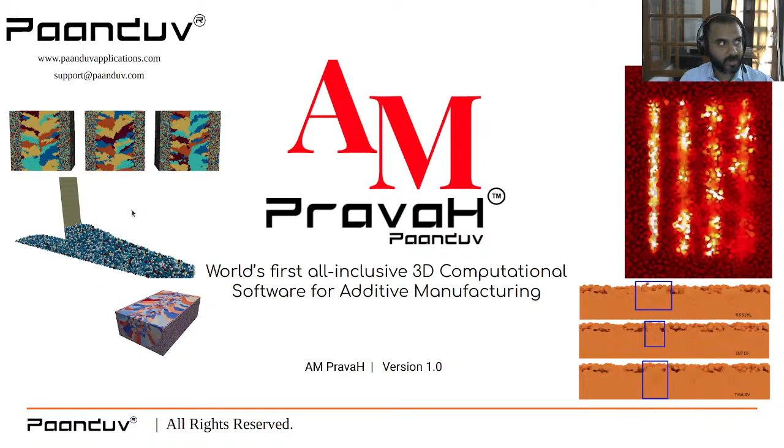Welcome everyone to this webinar on AM PravaH, world's first all-inclusive 3D computational software for additive manufacturing. Last time we left off with a webinar on laser 3D printing multi-scale modeling. This was almost 8 months ago, and we were able to

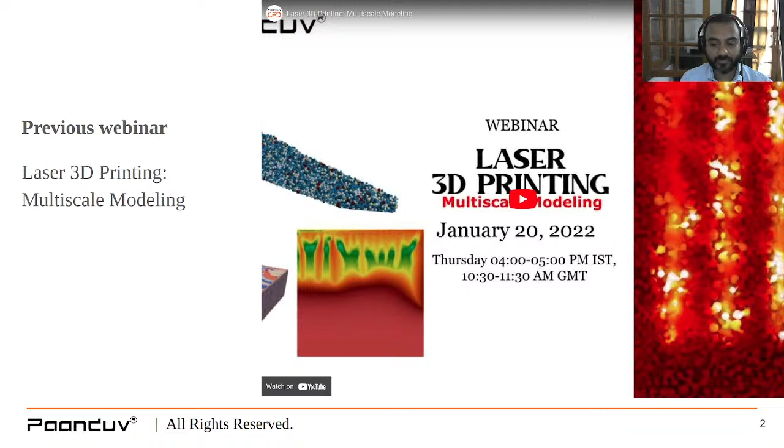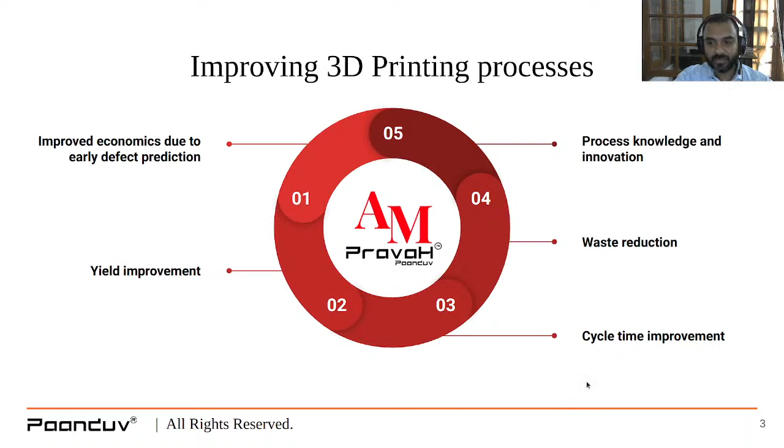indicate and show different results catering to the 3D printing industry at different scales such as micro scale, meso scale, and macro scale, and also some particle modeling as well. Now going on to the 3D printing processes, what exactly we want to accomplish with AM PravaH is improved economics due to early defect prediction, yield improvement, cycle time improvement, waste reduction, process knowledge and innovation.

The way AM PravaH tries to address the majority of these issues is dividing the whole modeling regime in two parts. One is pure physics based modeling and another one is pure database modeling. When we talk about physics based modeling, we are talking at a part scale where we want to do FEA and thermomechanical analysis of the entire part.

At the macro scale modeling, we want to perform the continuum scale modeling that involves melt pool dynamics, laser dynamics, particle dynamics, things like that. And then at the micro scale level, we want to capture the grain size, orientation, misorientation, and more of a Monte Carlo simulation side of things.

Now all this is fine for people who are into computational and experimental modeling, but additive manufacturing being a relatively hot field of research, a lot of new data is generated basically every day by researchers around the globe, and we have included an artificial intelligence module to AM PravaH, a quite advanced deep learning based module that allows users to make use of the existing data and also the new data generated either through computational modeling or through experimental modeling.

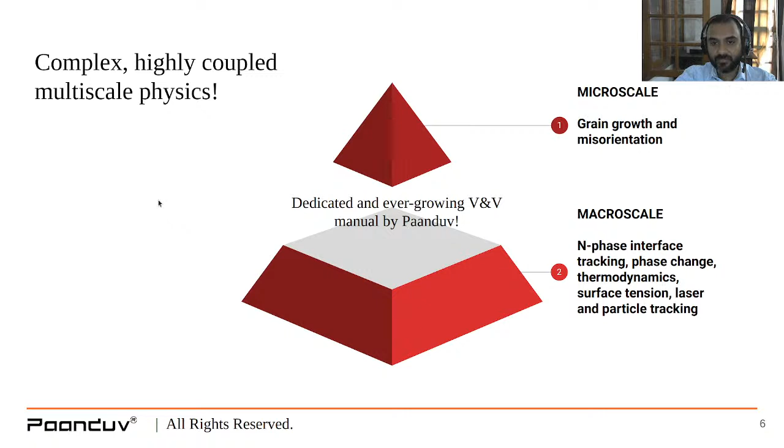On the micro scale front, you are very much interested in grain growth and grain misorientation of an alloy once the laser has run over it and it is going through the solidification phase. This micro scale modeling can have direct impact on properties such as creep and strength of an alloy. We strongly believe in a dedicated verification and validation manual for all the work that we do, and we have done the same for AM PravaH as well.

I'm going to go through some of the validation cases over the next few slides just to build more trust and convince you that we have not put together any random solvers in this software. They are quite state of the art, and as I speak, more development work is going behind them. So this is a simple case study of laser beam welding, one of the simplest validations I am going to show today, AISI SS304, and we had some results in comparison to another commercial software as well.

That software does not come close to the experimental data, so there was no point putting the results here anyways. We are comparing our data directly with the experimental data for different combinations of laser power and welding speed; there are 4 such combinations. We have experimental data available for the depth of penetration and the weld width, and we simulated the same set of parameters in AM PravaH and compared the results. You can see that for the depth of penetration, the error is under 4% in the worst case.

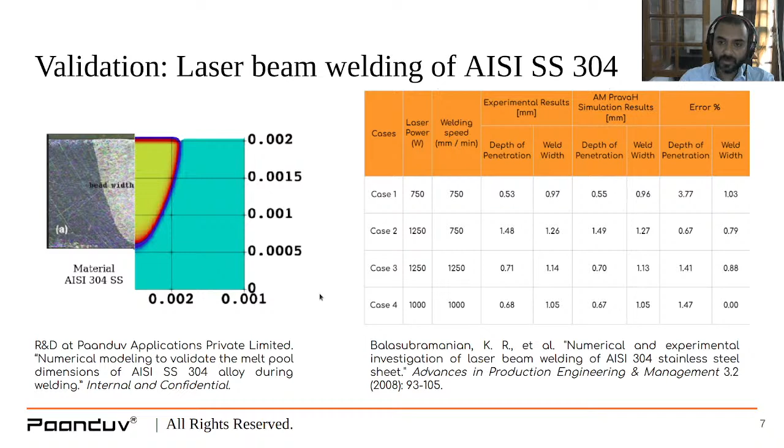The error varies from 0.5% to around 4%. And if you go to the weld width error percentage, the error percentage is actually under 1%. And based on the sheer amount of physics and numerical techniques deployed, I mean, this is quite good, excellent results, I would say.

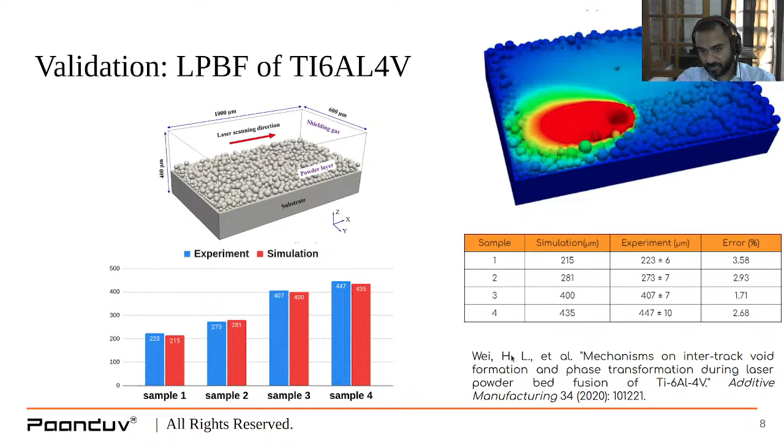Moving on to a complicated case of LPBF, laser powder bed fusion for Ti64, a common alloy. And here also the situation is similar. We have 4 different combinations of laser powers and scan speeds, and they are trying to report the width of the weld pool compared to experiment. Even here the error percentage is reported under 4%, or 3.5% at the maximum, and 1.7% the lowest. So yet again, this is an excellent validation.

Moving on to the microstructural side of things, the validation case study involves grain structure prediction of electron beam welding for nickel 200 plates, and we have 2 images on the right hand side of this slide. The top image is a cross section that is cut through the weld pool, and the bottom image is the laser scan track that we see from top, right?

And you can see that the experimental results match very well to the grain size distribution that is predicted by AM PravaH's Monte Carlo simulator. And then on the bottom side, if you look at the laser scan track, the results compare very well again to AM PravaH's Monte Carlo simulator.

And if we talk about experiment and simulation results, visually it's all good, but if you were to quantitatively compare the experimental data with simulation data, you can see the ECD, which is equivalent circular diameter. What they have done, they converted the circumference of a single grain into a circle, so that they have some relatively same parameter to compare against.

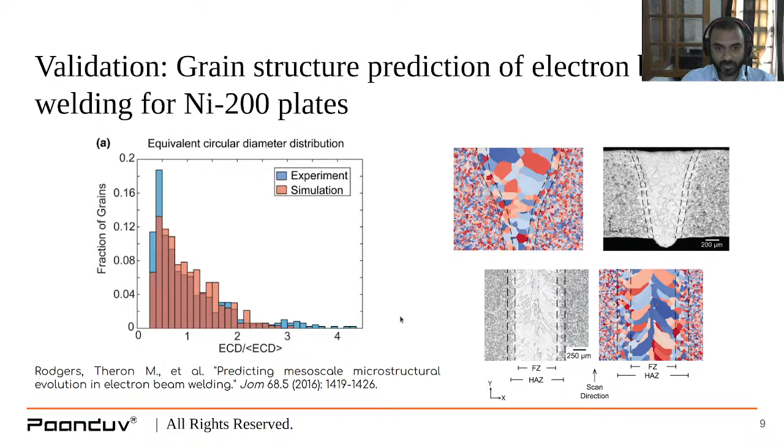And the fraction of grains, so for example, ECD of 1, you can see experiment and simulation have a very similar fraction of grains for an ECD of 1. There are some variations, but nevertheless I would say that these are quite promising values given the challenging nature of such simulations, right?

So moving on from the validations, let's focus a little bit on laser powder bed fusion, which is at the core of AM PravaH software. The process involves laying down a powder bed with a certain size of particles, and the particle sizes don't have to be constant either. They can be a Gaussian distribution or some sort of distribution such that you get the maximum packing with the particles. Then you hit a laser on top of these particles, which are on top of a substrate, and those particles melt and merge together with the underlying layer or substrate.

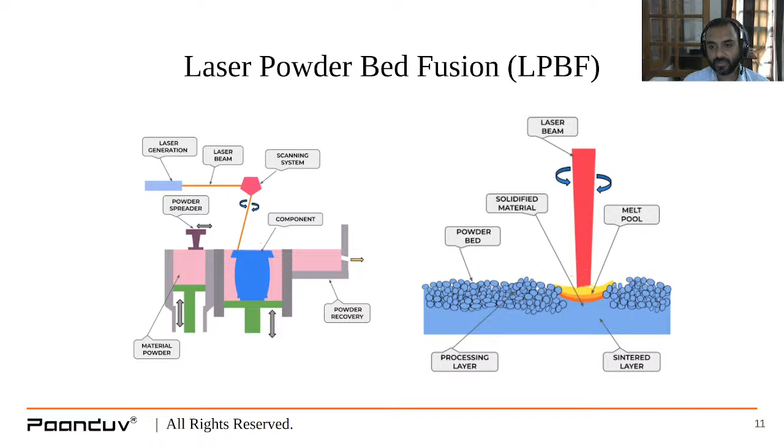So for the powder spreading part, we are using an exact DEM simulator, and for the right hand side, we are using the exact CFD simulator. A quick note on the physics of such processes. Again, you have a melt pool, you have a laser beam hitting the melt pool, you can have laser reflections and thermal fluidic convection, surface deformations, you have Marangoni effects, particle dynamics, solid state transformation, and solid mechanics as well. And overall, this is quite a complicated process, and we have tried to capture as much as possible without taking a huge toll on the computational power.

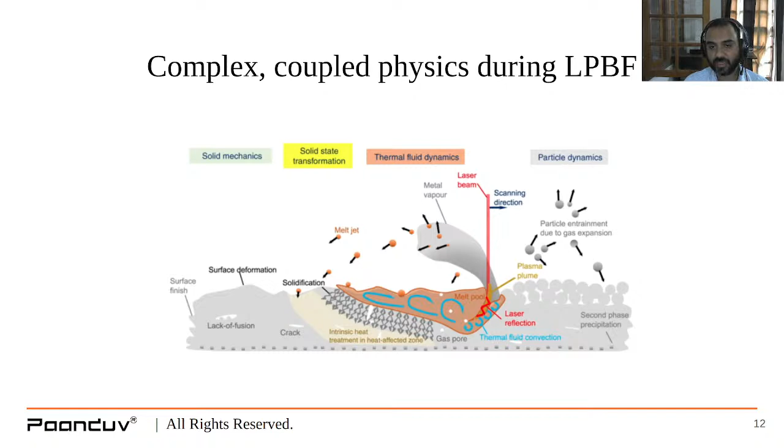A quick comparison of how the results that come out of AM PravaH look like. So we have taken 3 different alloys for the same set of process parameters. These are all commonly available alloys, but you don't have to stick to them. You can work with any alloy of your choice. And we have also provided a database of alloys, which I will be showing very soon in a live demo, where I'll open the software and run you through the different buttons and the design of the software. But anyways, SS316L, Inconel 718, and Ti64.

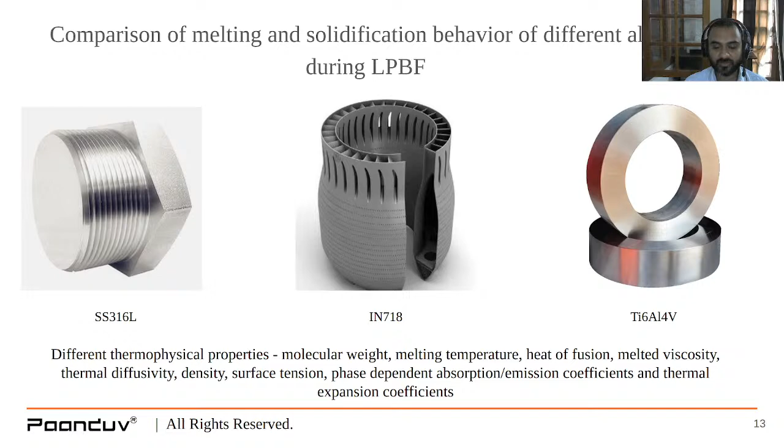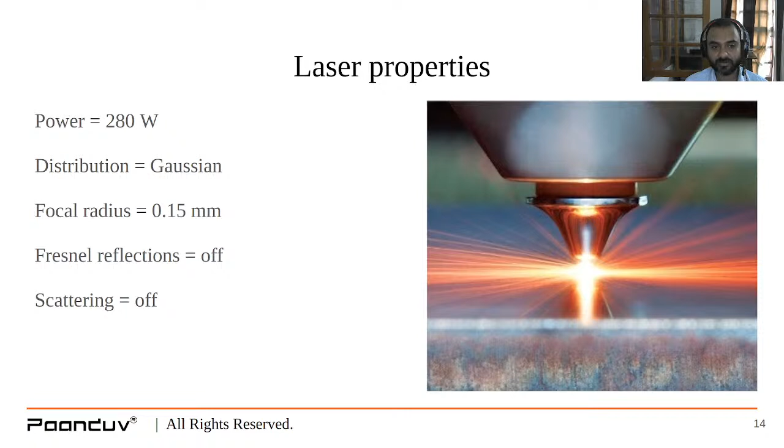Very well known alloys, and they have very different thermophysical properties, varying all the way from different molecular weights to melting temperatures to viscosities, density, surface tension. And then of course it is expected that the solidified build that you will get out of these 3 alloys is going to be quite different, even with the same set of laser properties. Right, so the power that we are using is 280 watts with a distribution type Gaussian, focal radius of 0.15 millimeter, and Fresnel reflections and scattering is turned off to keep things simple for now.

And the powder bed, this is what I was talking about. It is a Gaussian distribution, so you don't have constant particle size powder particles. You have basically a distribution going from 60 microns to 80 microns, and then the maximum of the particles are somewhere in between, as usual with this bell curve sort of distribution, at 70 microns. We are going to do approximately 2 layers of particles per powder spreading. Okay, if I show the video, this has come out of AM PravaH. I'll play it one more time.

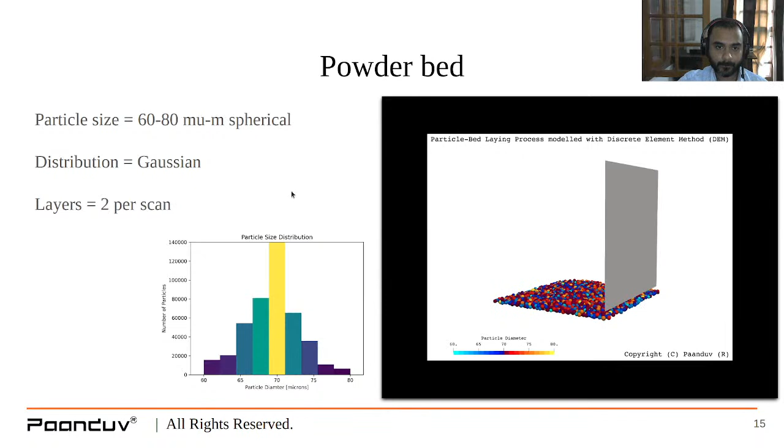The scanning strategy: there are many scanning strategies such as stripes, islands, rotation, nested strategy, but we are going to go with the most commonly used stripes strategy. We will have 1 layer, but the number of tracks are going to be 4 with a hatch spacing of 0.4 millimeter and a scan speed of 1 meter per second. We will be considering 3 phases here, and as I mentioned earlier, we can do any number of phases relevant to your problem, but in this case we will be doing the solid phase, which represents your actual solid alloy, the liquid phase, which represents your molten alloy, and the inert gas, which is the chamber in which all this activity is going on.

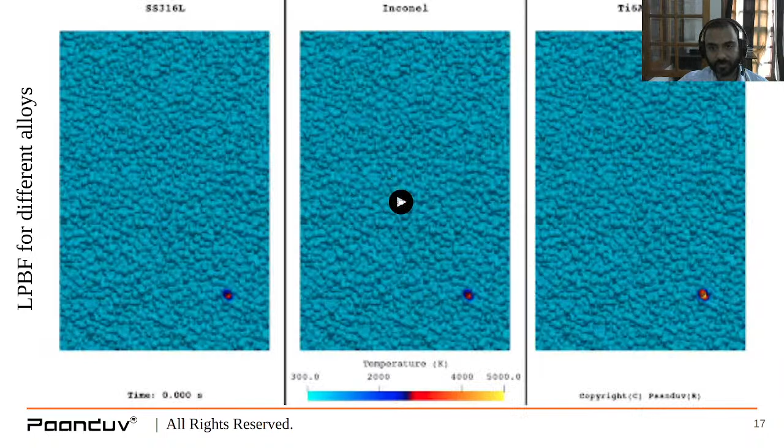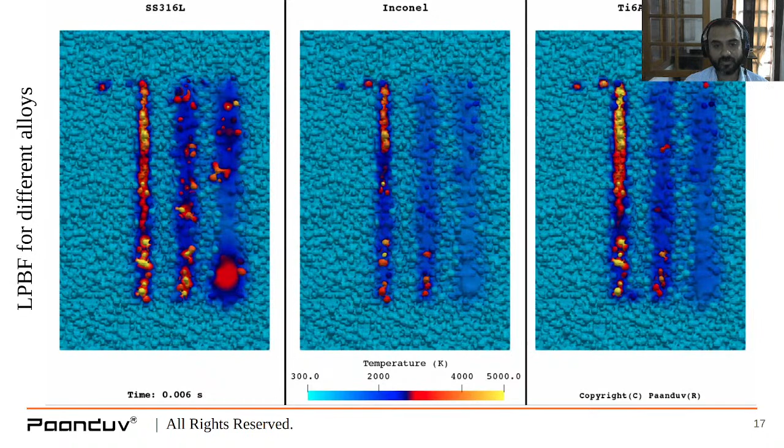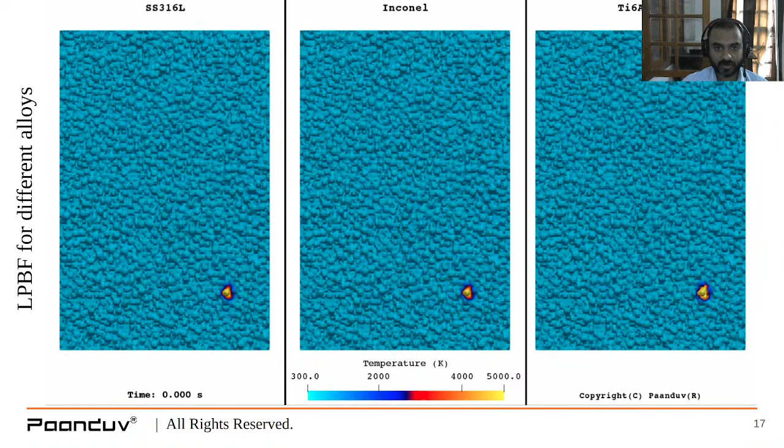So if you were to compare the results that came out of the simulation for these 3 alloys, you will see that the temperature distributions are quite different for these 3 alloys. If I play one more time, yeah, the width of the streaks and how much temperature we see is quite different for all these three. But at the end, after a good amount of solidification, you can see that the streaks or the final build comes out to be quite different.

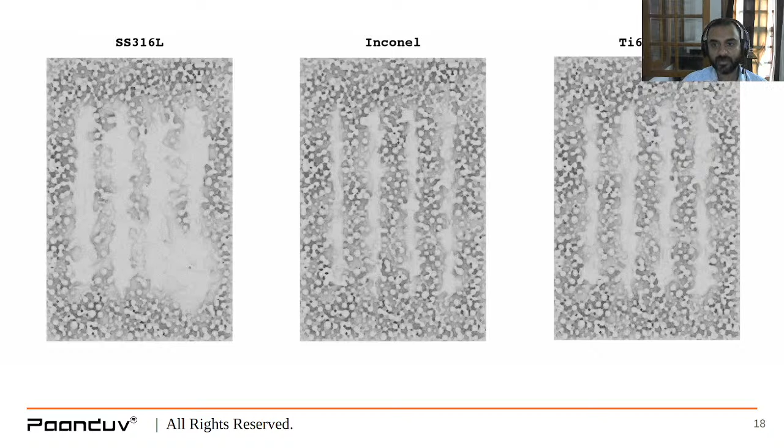Now these images are not experimental or X-ray images or anything like that. These are actually just the post-processing images that AM PravaH is capable of producing. We have coupled the state of the art post-processor available, which gives you the capability to produce almost movie grade and photorealistic looking images and videos. We have used that in this case study as well. And you can see that SS316L, Inconel and Ti64 have very different scan tracks after solidification.

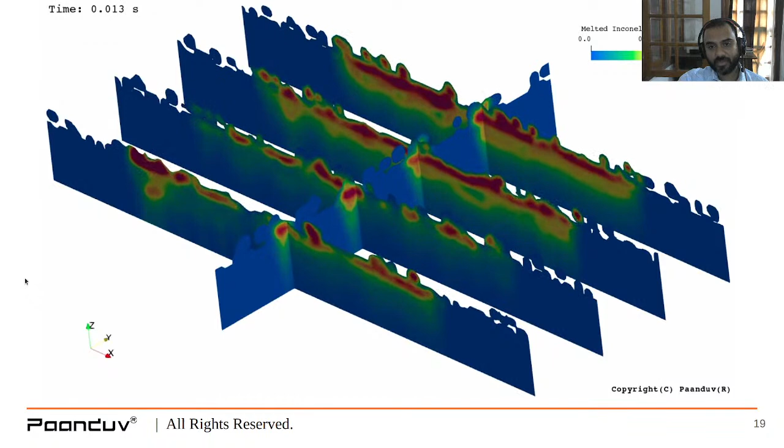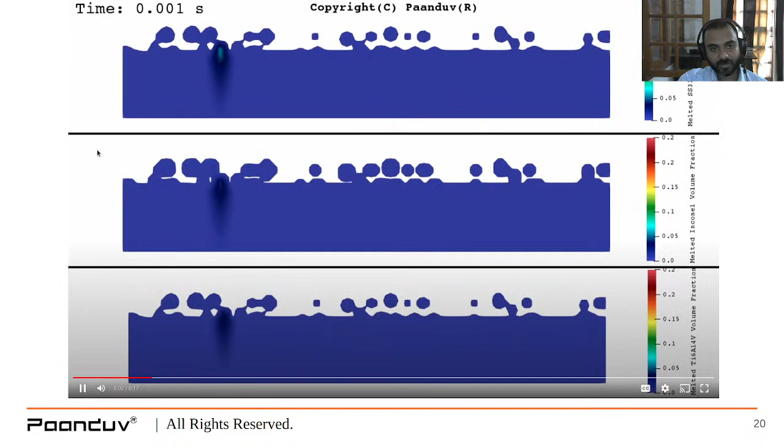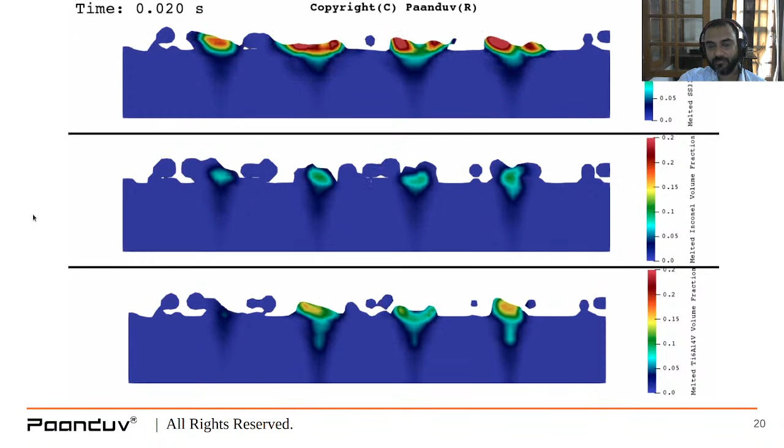Right? Some other capabilities of the post processor: you can take clips across the laser, and you can take cross sections cutting through the melt pools. You can see that the cooling is happening from the bottom towards the top, which is expected. And then if we look at the cross section of the melt pools, again these results are already quite good for the amount of computational power that is deployed. They're not run on any fancy computers, they don't take days to run, they are all parallelized. So on top of that, they give you results quite quickly.

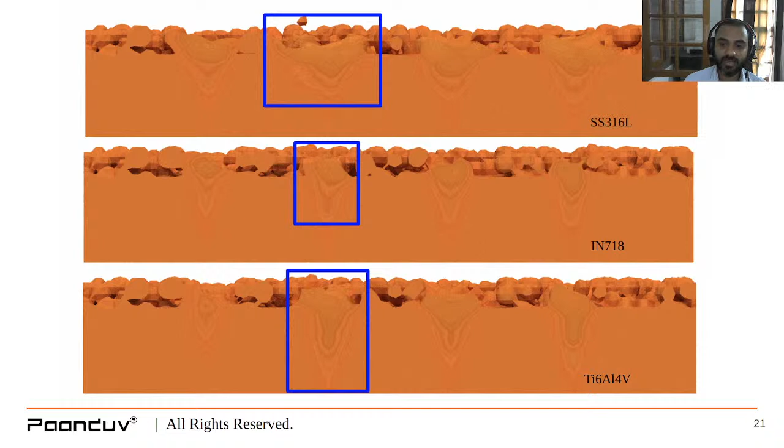And then again, this is another ray tracing or photorealistic visualization that we have done using AM PravaH. You can see for SS316L, Inconel 718 and Ti64, the melt pools are quite different, which is expected. And if we were to summarize, there are some observations not very relevant for this webinar, but yet there are some observations

regarding the shallowness of the melt pool or the narrowness of the melt pool, how much each of these alloys actually heats up when the laser hits them, how much overlapping is happening between the scan tracks, how far the scan tracks are spreading from their original position, how dynamic the melt pools are. So these are some of the observations that you could make right off the bat using this software, right?

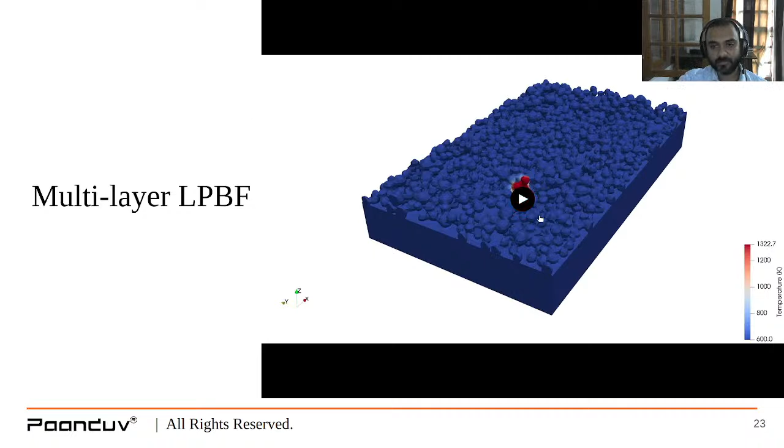And like I said, this is not limited to one-layer additive manufacturing processes. This is multi-layer. So we'll do layer 1, 2 scan tracks, and then using DEM we'll put another layer, and then again we run 2 scan tracks. This is for layer 2.

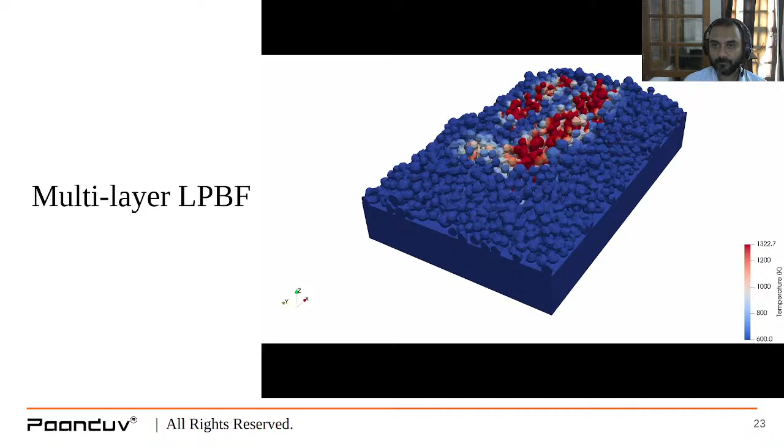Okay. Moving on, this is the visualizer that we have. We have coupled ParaView in the background. To the best of my knowledge this is the best post-processor out there, and in fact some of the commercial companies are also moving to ParaView. They just changed the name of the software to something else, and basically it's ParaView in the background.

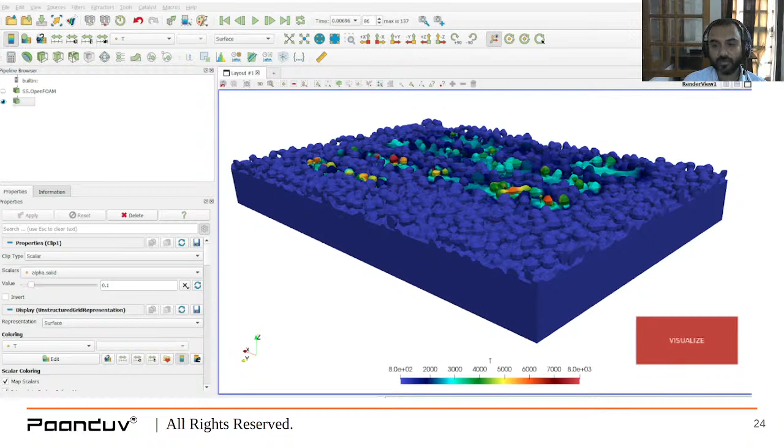It gives you immense capabilities in terms of calculators, contours, glyphs, clips, slices, streamlines, integrating variables. There's an entire data analysis module. You can actually write your own Python code or extract all your activity in the form of Python code. So it's very parametric in that sense, and the possibilities are basically immense with this visualizer, right?

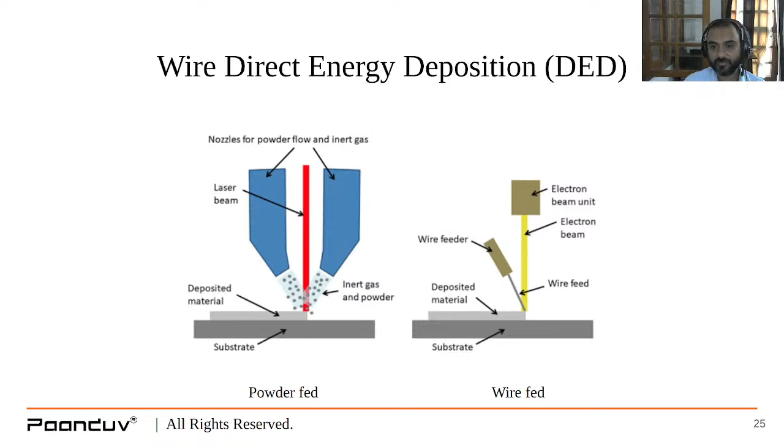We have also done some work on the wire direct energy deposition, DED, process, where we basically inject a wire and you hit the laser at the end of the wire just near the substrate. This wire melts and basically deposits over the substrate.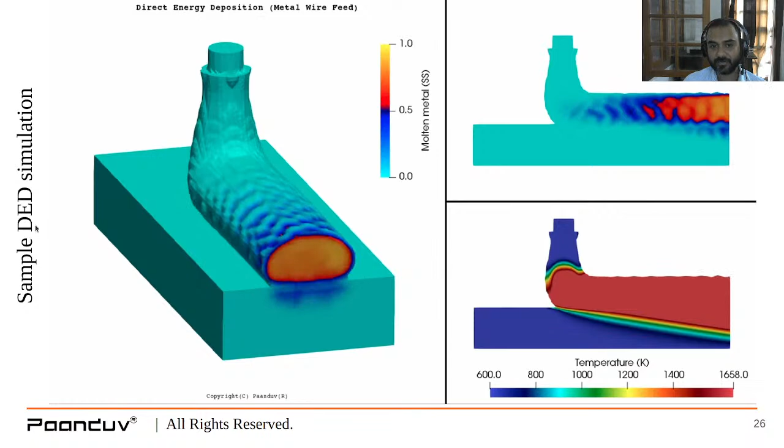If I were to show the video for this one, you see that the wire is coming down from a nozzle, and this is all happening in a very zoomed manner, and there's a laser hitting right at the intersection of the substrate and the wire. You can see as the substrate moves from left to right, it's carrying the wire away from it. Yeah.

Okay. So like I mentioned earlier, within the macro scale modeling itself, there are a million things going on, and we have put our best effort to capture everything simultaneously, including laser dynamics, material properties, heat and mass transport, multi-phase physics, and there are other miscellaneous modules possible as well, right?

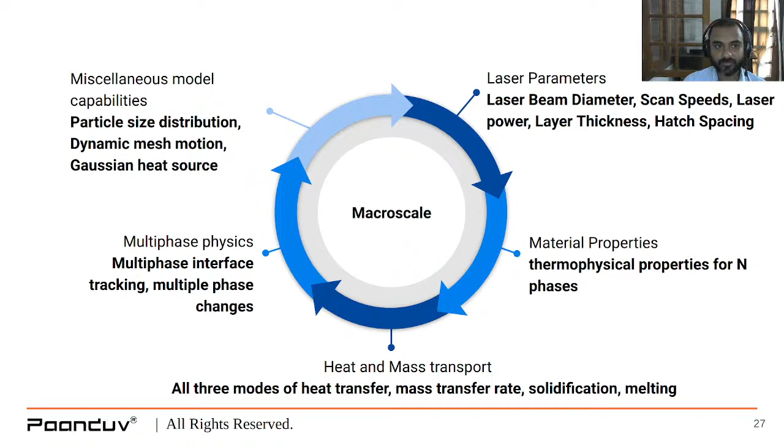On the micro scale side of things, we are interested in grain distribution, where during melt pool solidification grain boundaries move around, they rearrange, they misorient from the supposed orientation, and the grain size increases or decreases based on the grain boundary area per unit volume, right? In normal grain growth, this occurs relatively uniformly, but in abnormal grain growth, one grain grows at the expense of the other. So one grain will increase in size and the other grains will have to shrink, because the volume has to be conserved, right?

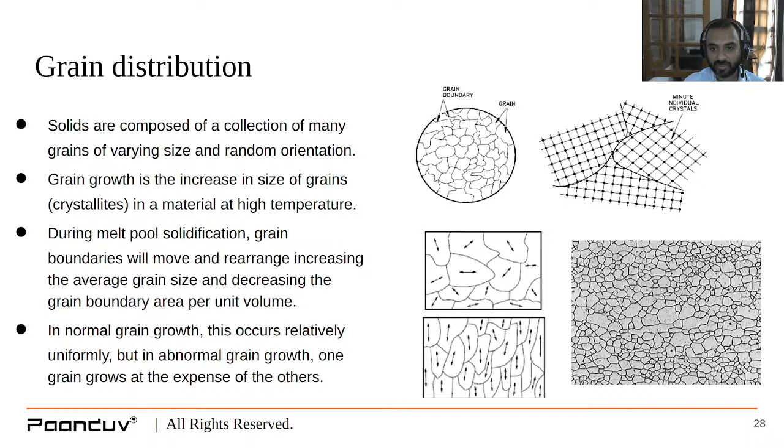So in this sort of modeling using AM PravaH, I'm going to show 4 layers of laser scanning and the corresponding changes in grain size distribution. You can see in the beginning all the grains are randomly oriented. So layer 1 track 2, layer 2 track 1, track 2, then layer 3 track 1 and track 2. Then if we go to layer 4, we have track 1 and track 2.

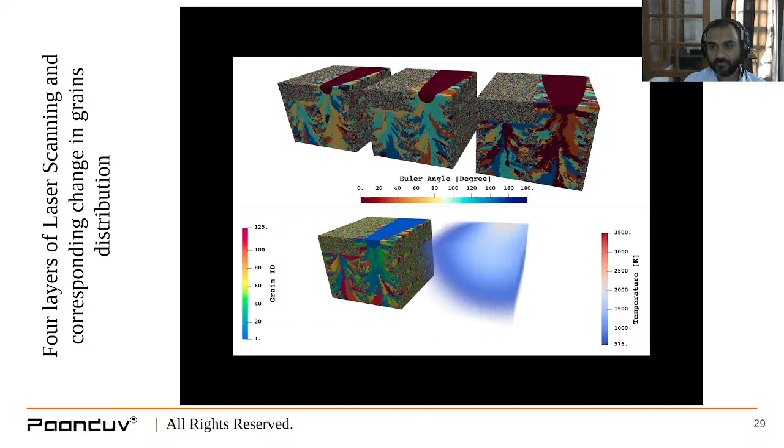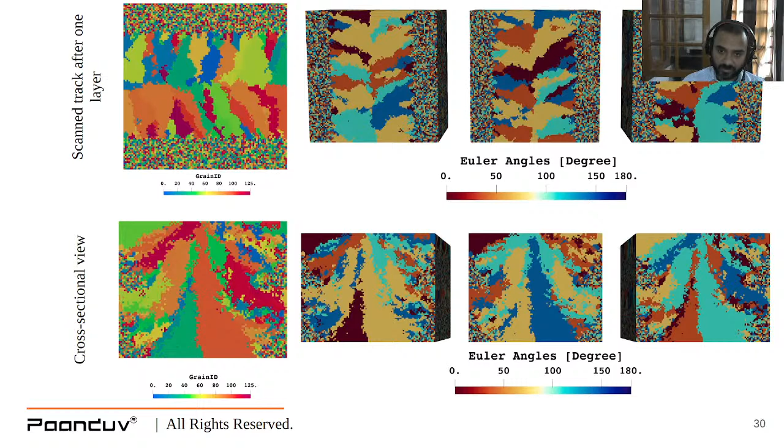So at the end of this whole process, you can see the grains have completely misoriented, and we are able to visualize it. Again, we have focused a lot on the visualizers, and not just on the solvers. The idea is, if you can't create and use meaningful data, there's no point in doing all these complicated simulations, right? So we have added a lot of code to visualize the misorientation angles, and to visualize these grain orientations in different Euler angles as well, right?

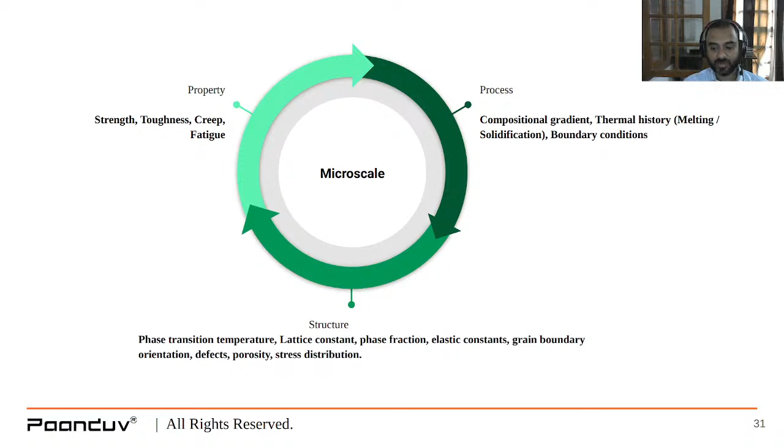Okay, so on the micro scale front, like I mentioned, those of you who are doing experimental work will understand and appreciate that some of these parameters that depend on grain size distribution can directly affect the strength, toughness, creep and fatigue of an alloy, right?

And then moving on to the data-based modeling, before I show the live demo. The idea here is to improve the existing research and keep improving it as we use these deep learning modules in the future as well. So how can they help the current users or current experts in the AM industry? This deep learning module or artificial intelligence module can help experimental and computational people both in real-time decision making to maintain the process efficiency.

It can help in prediction of experimental outcomes based on previous experimentation, because experiments are expensive and simulations can be long to run. Once you have a lot of this data available, or some amount of this data available, you can have a virtual assistant that keeps helping you down the line with all the experience it has gained in the previous experimental or computational work.

So one example could be a simple prediction of macro scale and micro scale parameters based on the process parameters and the operational parameters that you have put behind the machine, right? We have provided some default NIST data sets from the National Institute of Standards with our software. One case we show in the demo is, we take some user process and alloy properties, and based on that we predict the melt pool width, depth of penetration, and more things like that.

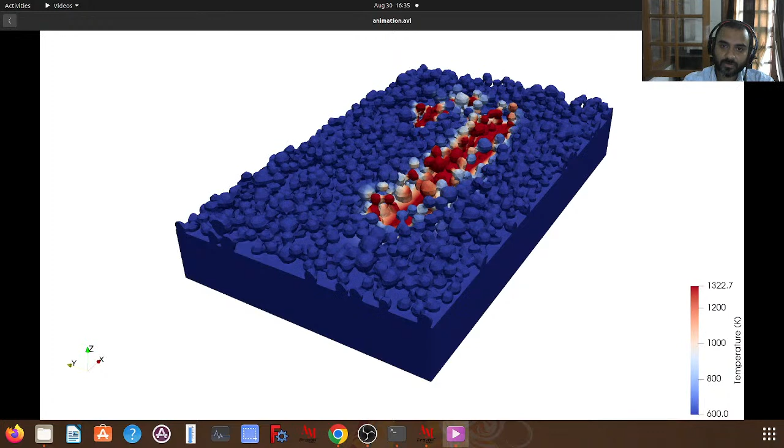So we won't be able to showcase the real simulation run, but we have some of the results available; basically it's the same simulation that I showed in the presentation that we are using for demo purposes. So actually we had 2 layers in our Excel file, so it will take 2 layers from there. Okay. You can see that earlier I ran the simulation with 6 processors, so that is there. Okay.

All right, so let's see. Yeah, one more thing, you don't have to really go anywhere to visualize the results. You just hit visualize, and right now all the buttons are completely blocked, and this is by choice, simply because we don't want you to be changing anything while the simulation is running. And this idea is again originating from the fact that we don't want you to be changing things by mistake

while a simulation is running, because the solvers that we have used are completely capable of picking up the results. So if a simulation is running and at the same time you change some value and hit run, it will immediately pick up the new value and start working from there. So we don't want that. Okay, so the simulation is still running.

I'll close the software for now and launch it again. Let's see what we have in between. Yeah, it's still running in the background. Okay, I don't want this to continue. I'll kill it for now, if that's possible at all. Okay, yeah, launch it again. So these simulations take time and they also can be heavy at times, so we don't want to do everything real time right now.

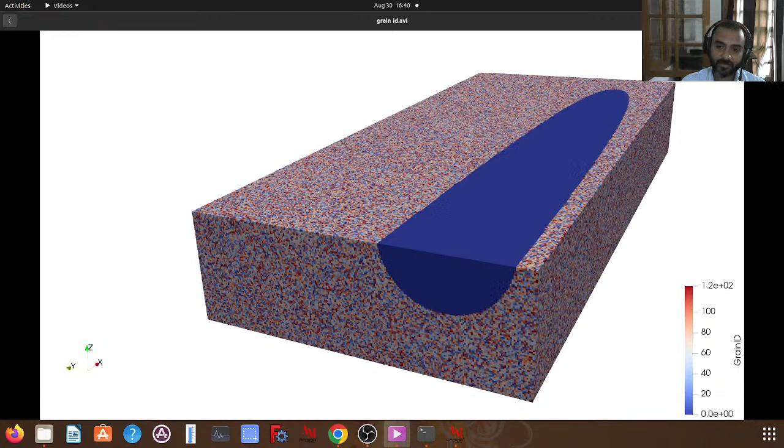I won't run the solver for this one because it's just going to take time, and with so much video and live streaming going on, it may not be a good idea. But nevertheless, we have some results for one layer micro scale. You can see it's one layer and two tracks. As the laser runs over these microstructures, the grain sizes are changing. I'll play it one more time.

Right, so this is what we can do with this type of modeling. And then lastly, we have the deep learning module where you can give an agent name, for example, demo AI agent 1, and the number of neurons per layer. So like I said, it's a deep learning module, and the number of neurons per layer basically indicates how complex your neural network, or your deep learning module, has to be. So if you give a number 4, it will be less complex, but we have found 8 is a good number in most of the cases.

Now let me explain how exactly you can use some of this data. Okay, so let's look at some of the NIST data. They have power, welding speed, gas flow rate, focal position, angular position, material thickness, weld number and cross section, position in the weld, and they have different sets of process parameters for 246 experiments. And corresponding to each of these experiments, they have reported the weld seam width for the copper. So there was, I think, a lap joint sort of welding that they did, and then we have corresponding 246 values for the weld width.

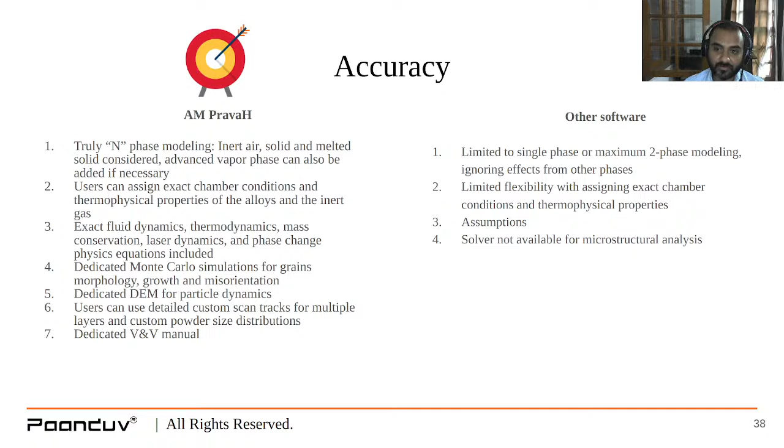Now, if I look at some of the other software, to the best of my knowledge, they are mostly limited to single phase or maximum 2 phase modeling, ignoring the effects from other phases, and I don't think that's accurate. There's limited flexibility with assigning exact chamber conditions and thermophysical properties. Then there are certain types of assumptions that are made in solving the physics equations. Solvers are not available for microstructure analysis at all, keeping the whole computational modeling incomplete.

On the performance side of things, again, AM PravaH has a lot of benefits. All the solvers are completely CPU parallelized for fast simulation runtimes. The post processor also takes advantage of good NVIDIA GPU cards if you have them; it will automatically pick those up and give you good results. There are advanced deep learning modules, parallelized on GPUs, which can enhance the experience of AM experimentalists and researchers.

It has a simple, flattened modern interface for maximum performance. The terminal is decoupled from the post processor and the user interface, again to improve the performance. It has multi-layer modeling, and it is very simple to launch. You just upload the Excel sheet of whatever strategy you have, and it will automatically pick it up. And it has absolutely state-of-the-art visualization that benefits from the latest GPU processors.

Now, with other software, scaling is possible, and I would say they are also parallelized on CPUs. But there's limited scaling because the licensing is dependent on how many processors you want to run. We don't do anything like that. If you have a 1000 core machine, you can take our software for the same price and run it on 1000 cores. So it actually launches our users into the domain of high performance computing. Utilization of experimental data is completely ignored. The user interfaces are very heavy and they slow down the computers. Okay.